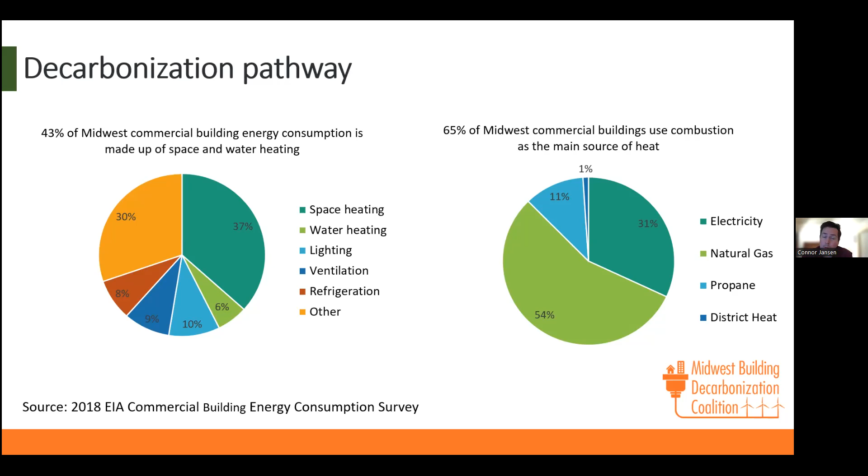Now, the reason for this is that many Midwest states, communities, and institutions have pledged decarbonization goals, and it's imperative that we meet these challenges. In the Midwest, we really need to focus on solutions that can help heat our buildings without contributing to greenhouse gas emissions. On the slide here, we're showing that 43% of Midwest commercial building energy consumption is made up of both space heating and water heating. And nearly 2/3 of our commercial buildings use combustion as that main source of heat.

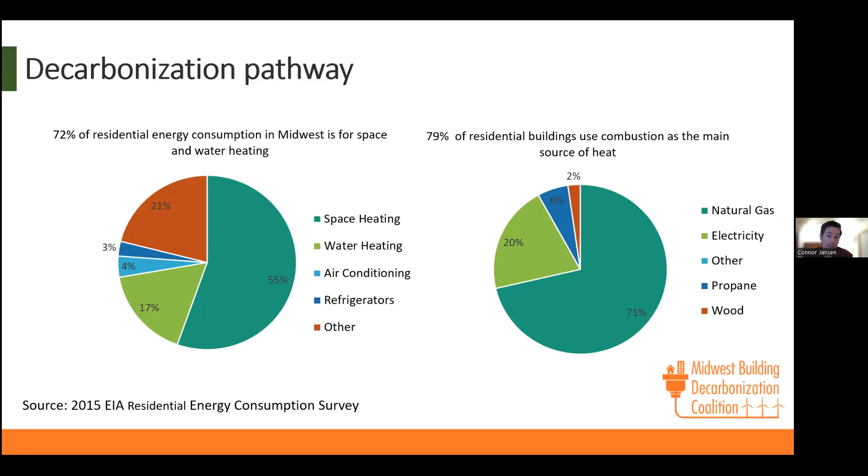Now, these proportions go up when we look at residential buildings. 72% of residential energy consumption in the Midwest is for space heating and water heating. And nearly 80% of our residential buildings use combustion as the main source of heat. So what can we do to limit the use of natural gas for heating and hot water? Well, clean heat infrastructure can certainly help with this. This is one of the many tools that we'll have.

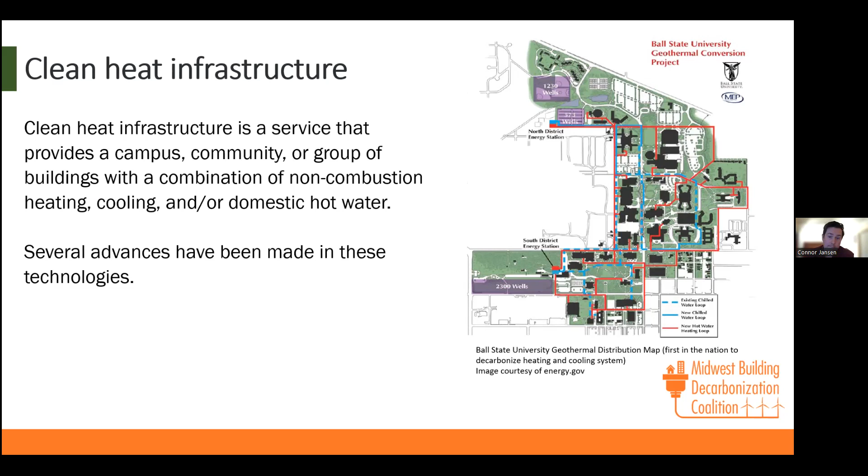Now, shared resources with shared infrastructure helps increase overall opportunity for these types of systems to scale. This common infrastructure can help improve cost effectiveness of electrification. It also has alignment with, and they may result from, building performance standards.

Building performance standards are essentially codes or requirements that look at existing buildings' energy performance and set standards or requirements for those existing buildings to be retrofit to meet these higher performing thresholds. These are more prevalent in the Northeast right now, but we want to be prepared here in the Midwest as well.

The centralized infrastructure can also help reduce some of the challenges that we see in distributed air source heat pumps. These are a really important technology to aid in our building decarbonization, and they do work pretty well within cold climates as well. But one challenge is that as we shift our buildings to predominantly use air source heat pumps, our overall peak load demand on our grid will not only switch from the middle of the summer to, let's say, a cold winter morning when we need to heat up our buildings, but it will also likely significantly increase. So these types of systems help keep that increase of peak load down.

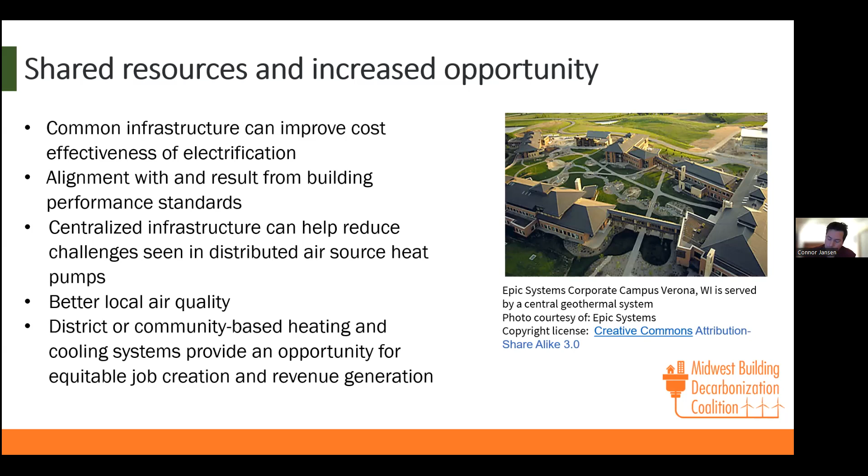Lastly, we have described here that district or community-based heating and cooling systems also provide an opportunity for equitable job creation and revenue generation. And district systems have been around now for nearly 150 years. The early and even current examples are especially prevalent in European countries. And the advancement from these first coal-fired steam systems that started back in the 1800s started to combine heat and power together for production, helping to increase overall efficiency.

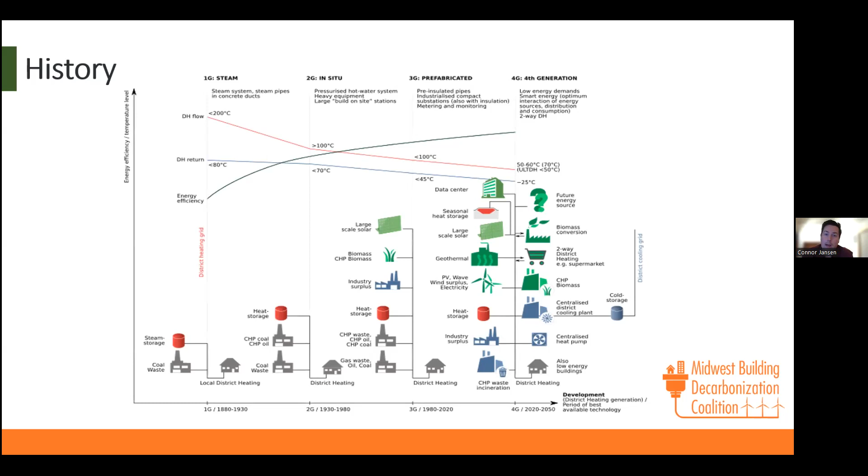And these second generation systems really created much of the infrastructure we see here in the United States. They were built between 1930 and 1980. And while these aging systems have been advancing the last 40 years or so by adding different streams of waste heat, they still use high water temperatures and large scale equipment, and they aren't very flexible. But current advancements in technologies have opened the door for smaller, more distributed systems that are connected to a central loop and operate at a lower working temperature.

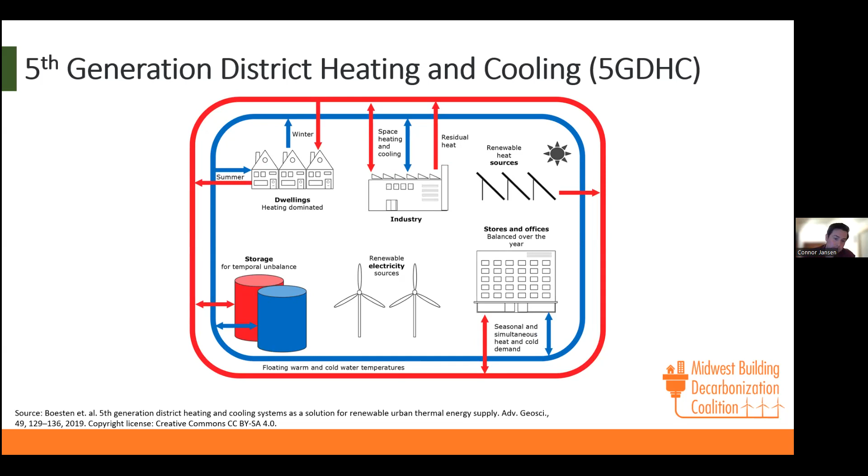One really interesting example of this type of system, which we've dubbed Clean Heat on Main Street, is in West Union, Iowa, which is a small town of about 2,500 people. And they had a federally funded $10.2 million initiative to green up and improve their infrastructure, replacing streets, water mains, and sewer lines. And they used this opportunity to also add in a geothermal loop for about $2.3 million, which significantly saved costs if they were to just do that system alone and have to do all that work tearing up streets and things like that.

And so they installed 132 wells, which provides about 264 tons of heating and cooling capacity. And that system serves 11 entities right now. The city-owned system is leased to West Union District Energy LLC, which is made up of the system users, each paying in $14 a month per ton of capacity that they need. And what we've seen so far from all of the case studies on this, they've shown both an energy and utility cost savings over the traditional gas heated systems that these buildings once had.

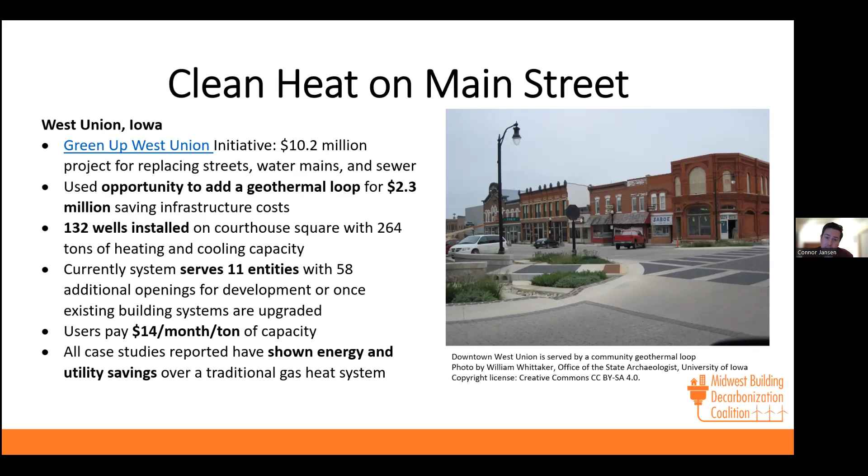Now, there are several different energy sources for clean heat infrastructure. The most prevalent is really geothermal or ground source heat pumps. And there are thousands of applications of these systems in the Midwest today. Now, these are more standalone, individual buildings with their own individual set of geothermal wells. But with this concept, we're essentially taking that same system and expanding and having a centralized set of geothermal wells serving multiple buildings. And we know that these standalone systems work really well. I feel like every 6 months or so, I read an article talking about a new net zero school that has gone up. And more often than not, that net zero school is utilizing geothermal technologies.

Another potential avenue would be large-scale air source heat pumps. And this could help provide a possible one-for-one conversion for existing boiler systems. So replace that old gas-fired boiler. New technologies are emerging right now. A lot of the growth in this market has been led by European countries, but we are starting to see some of these technologies come to the US, which is really exciting.

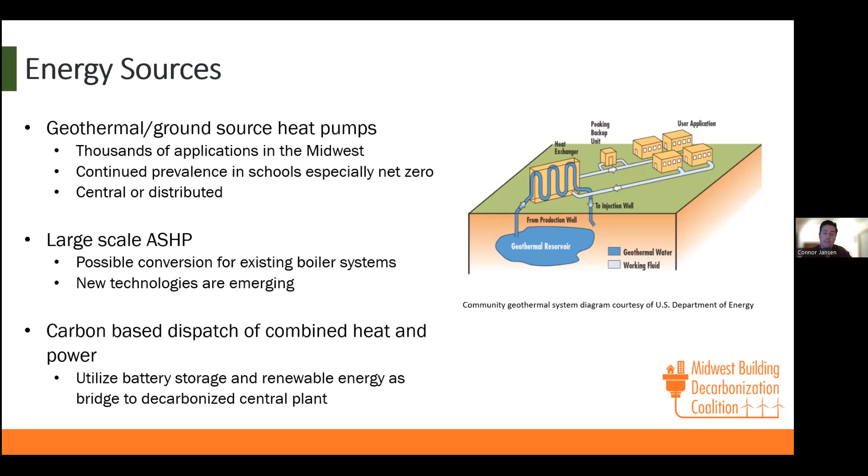It's important to have enough capacity within these systems, the ability to put the infrastructure in, and some level of diversification of loads. Another application would be to convert existing plants over. So we've seen this on the university side of things and in new medical and commercial campuses, essentially moving from combustion-based central campuses over to geothermal type systems.

You could also look at new large-scale district clean energy projects. Some newer district projects have gone up over the years, usually combined heat and power, some of them perhaps using biomass as one of the many different fuel sources. Typically, these would work best in dense urban areas with lots of load diversity.

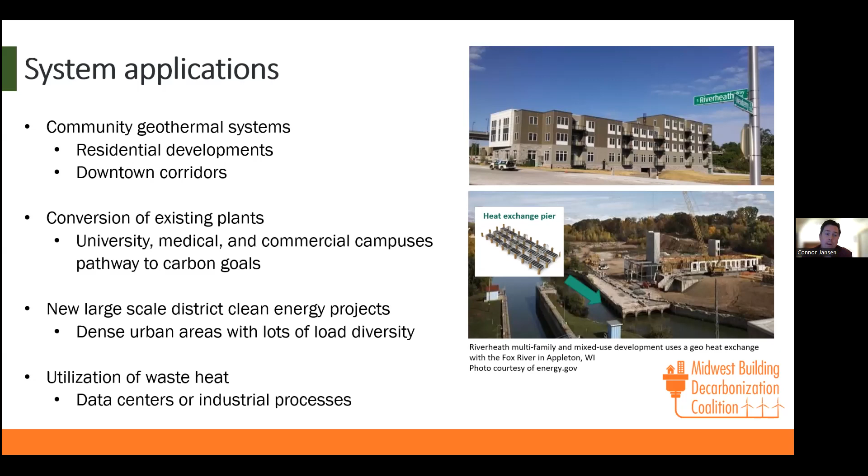When it comes to college decarbonization and district geothermal systems, the list of projects here is growing. A really good example is Carleton College in Northfield, Minnesota. And to just set the stage of the time frame here, back in 2011, they set a goal to be carbon-free by 2050. And they really used a phased approach to completely transition their central plant off steam to a lower temperature 120-degree heating hot water system, which a geothermal system could work with.

And in fall of 2021, they completed this project. And that geothermal system will be serving 70% of their annual heating and cooling needs. They implemented a new high-efficiency gas-fired boiler to address some of that peak heating demand. And then they're going to keep their existing chiller to address the peak cooling demand.

So this is a really cost-effective approach to work towards decarbonizing their campus. And overall, they're expecting to save 29% on operating costs and about 15% on CO2 emissions. And that number is only going to grow as the grid gets cleaner.

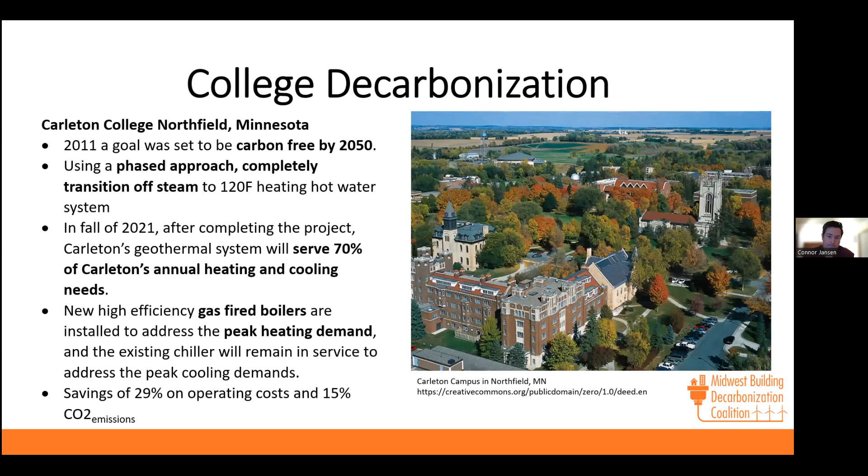Outside of energy efficiency and carbon improvements are labor benefits. And skilled labor is going to be needed to operate district systems, providing career opportunities and advancement for several people within this industry. And the centralized systems are going to increase the need for full-time operators in lieu of the distributed technicians out there that may be servicing air source heat pumps or something like that.

And what's important to point out here is that with the installation of the system, they were able to keep about $600,000 in annual energy expense within the local community, helping to create jobs to not only just run that system, but also for the local forest products industry. It's a really good story there and partially funded by the USDA.

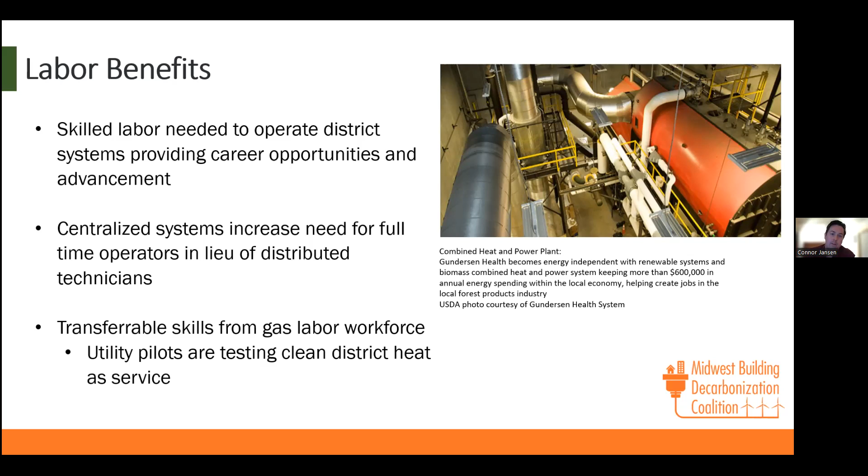Equity improvement is another important consideration. And these systems really have the ability to help reduce housing energy burden by being very efficient and providing opportunity for sharing of different heat and cooling streams across the campus.

They provide a pathway as well for individuals to decarbonize from low and moderate income households. So they can connect to a clean district plant, but it would probably be pretty challenging for them to cover their own full cost of an individual geothermal system. There's also really important ties with these types of systems to public housing and other owner operators looking to reduce operating expenses through upfront investment.

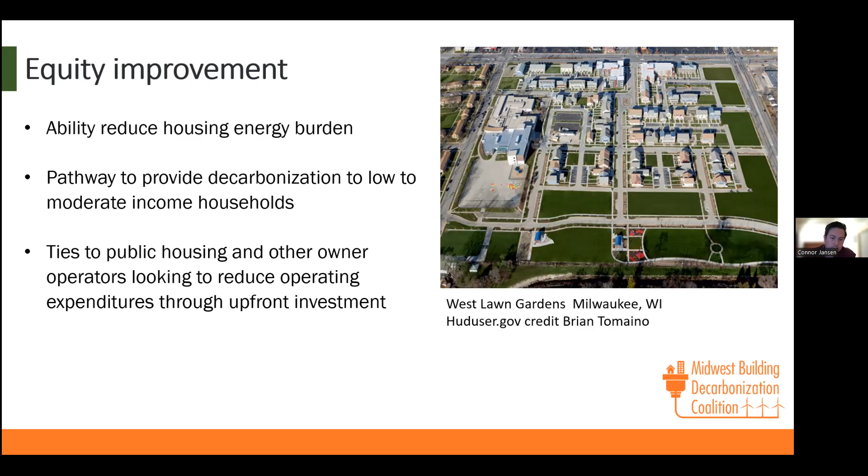With that, I'll pass things back over to Jacob. Great, thanks Connor for that overview.

We also wanted to touch a little bit on some of the questions we heard from potential stakeholders about what business models for these types of systems can look like and what types of funding opportunities are currently out there or might be on the horizon.

So in terms of ownership models, the most prevalent for these types of community scale clean heat infrastructure systems is some sort of public-private partnership, like we saw in West Union, where there's that West Union Heating LLC that operates the system. And in general, a single ownership model is the most prevalent that we've seen, although there are examples of systems with more of a multiple or community ownership model in existence as well.

We know that there are federal grants available or in the works through some of the legislation that has been passed in the past couple of years. The IIJA, or the Infrastructure Investment and Jobs Act, created some competitive grants through DOE specifically for advancing community geothermal systems.

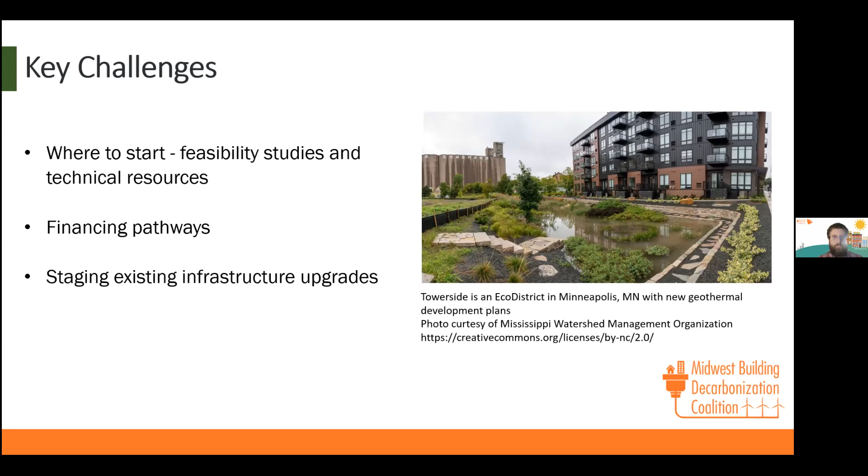We have seen a rise of utility programs in support of these types of infrastructure projects. The first big example was with National Grid in New York. So they deployed their pilot back in 2016 for 10 houses. And then in 2020, an additional $12.9 million proposed to deploy an additional 2,600 tons of shared geothermal ground loops that would serve the equivalent of 650 single-family homes. So really ramping up from that first initial pilot that they did in New York.

In the New England area with Eversource Energy, we saw Massachusetts pass the New England Climate Bill that allowed for network geothermal projects, pilot projects to start with Eversource as a possible solution to their aging gas infrastructure instead of continuing to expand that fossil fuel system. So they are in the process of selecting sites for their initial 3-year pilot that'll occur in Framingham, Massachusetts, serving 100 homes and commercial customers.